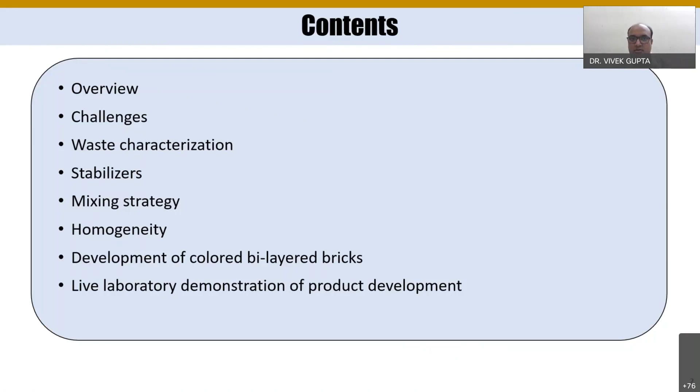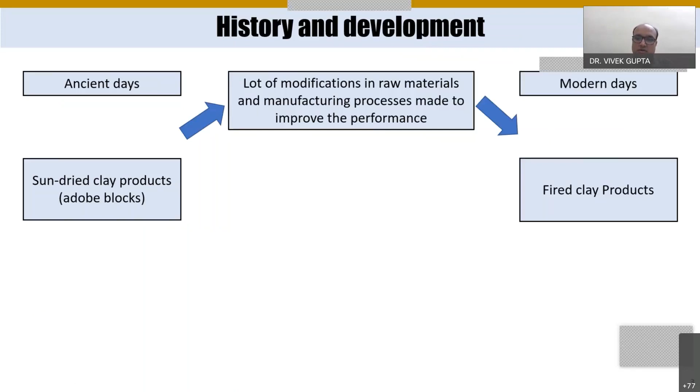So to start with, in ancient days, we were just using the sun-dried clay products for adobe bricks for our building construction purposes. And with the centuries, a lot of modifications have been made in the raw material and the manufacturing process to improve the performance. And it is well known that there are certain issues regarding the durability of the adobe blocks. So we have just improved the manufacturing process, and we reached the fired clay products in the modern days. So in this particular process, somehow we have lost the sustainability.

So this is the brief about the fired bricks, how we prepare the fired bricks. We typically use raw materials like the soil. We use the coal dust in the soil, which acts as an internal fuel for the fired bricks. Then we also use the wooden dust to help in the demolding. In the earlier days, we used to have the casting of the bricks manually by the helpers, but nowadays we have installed the machines, and now we demold the clay bricks from the machines, and we just cast them similar to the unfired bricks. The clay material is very sticky in nature, and it is difficult to demold instantly from the machines, so we use the wooden dust to help in the demolding.

Also, we have used many of the wastes like the agriculture crop waste and stone dust. For the colors, we also use the red surkhi and the stone mining waste for a better color, because aesthetics is one of the big challenges in the brick industry. So then how do we manufacture this? There are four steps mainly in the production of the fired bricks. One is the processing of the raw soil. First of all, in earlier days, what we do, we just...

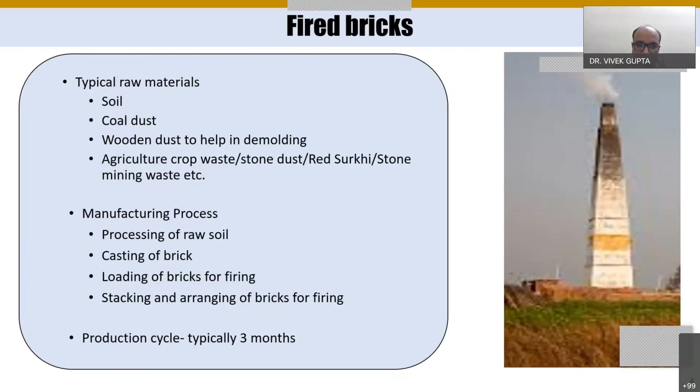When we put it in the sunlight for drying, there is rain and other environmental constraints, which actually restrict the manufacturing for almost 3 to 4 months, and we can say the effective cycle is only 6 months. So this is the typical fired brick, and the production cycle is almost 3 months.

These are the different issues we are facing with the fired bricks. It is a medium to high energy intensive industry. The manufacturing process is highly polluting to the environment. Then it is very highly labor dependent.

In earlier days, we used to cast them in molds manually, but nowadays we have partially replaced that process with machines. We are casting them through machines, but still it is a labor intensive industry, and from the drying area to the firing, their arrangement in the kiln, that complete process is still manual.

Then there is a disposal issue of the fired bricks, like the bricks which are in the mid side of the kiln are rich in soluble chrome and absorbed aromatic carbons. So we cannot dispose them directly in the environment. So these are the different challenges related to fired bricks.

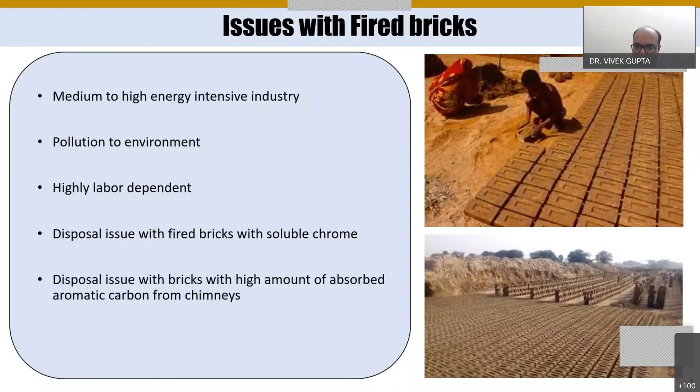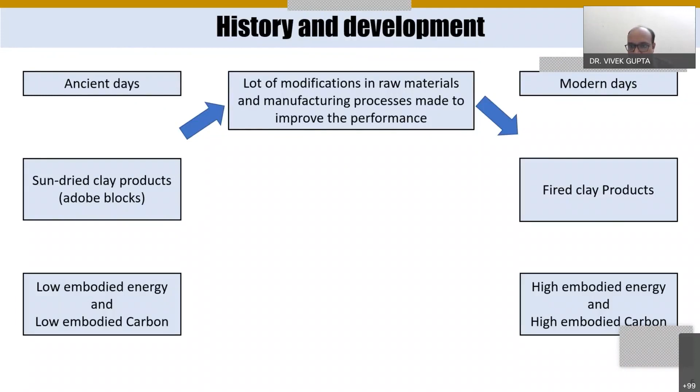In this process, as I explained in the earlier slide, from the sun-dried clay bricks we have reached the fired clay bricks. And the low embodied energy and low embodied carbon product was converted into a high embodied energy and high embodied carbon product. So somehow we have sacrificed the sustainability. So the question for the researchers was how to bring the sustainability back.

What the researchers have done in the previous decades is propose a manufacturing process which is unfired. The unfired brick manufacturing process has been suggested by many researchers to bring the sustainability back. So can we really prepare sustainable bricks without firing?

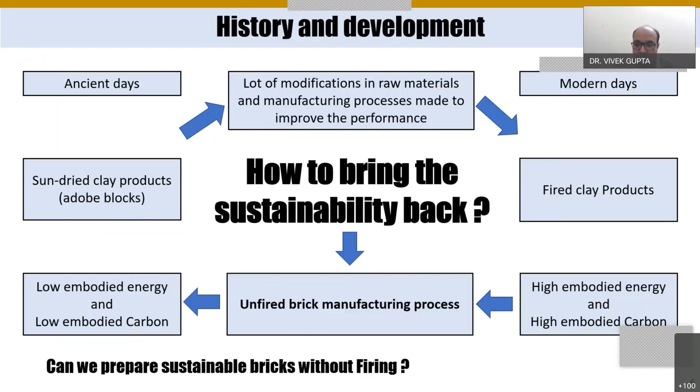Yes, in current markets we have both types of products: the fired bricks and the unfired bricks. The popular fired brick product is the red clay brick, and for unfired bricks we usually see fly ash bricks in the market. These are the two major products we can easily find in the market nowadays.

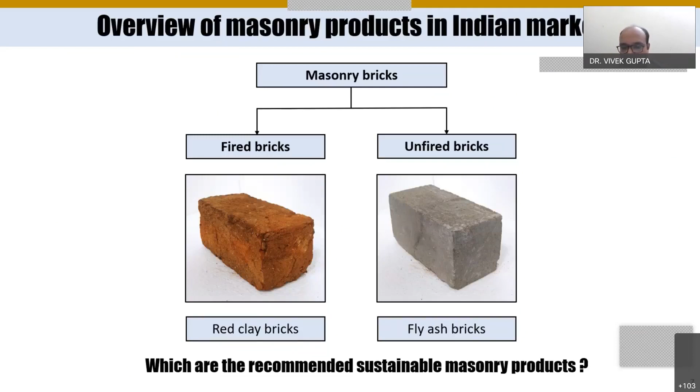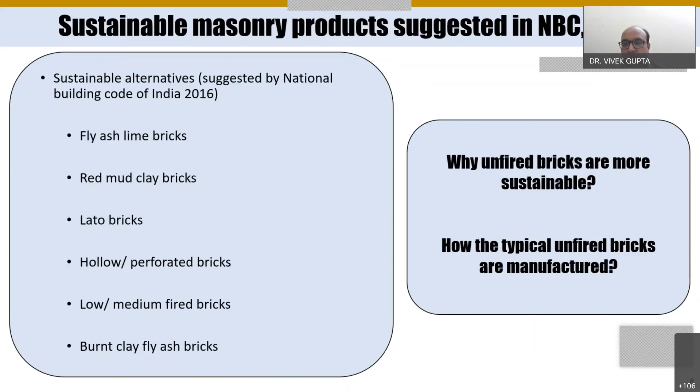The second thing is we are utilizing waste in the unfired bricks. That is another advantage, the conservation of natural resources, by which we are achieving sustainability through unfired bricks. So these are the two things which are mainly important related to the sustainability of unfired bricks.

So these are the unfired bricks, like typically in the market we see the fly ash bricks, and the typical raw materials are: either we use lime or cement as a stabilizer, then sand or stone dust as fines, and fly ash we use generally as a filler material or the partial replacement of, we can say, the binder, as it is well known that fly ash reacts with lime and shows pozzolanic activity. So many researchers considered this as a supplementary binder in the bricks.

Then what are the advantages of the unfired bricks as compared to the fired bricks? These are machine manufactured bricks, the manufacturing process is environment friendly, and the typical production cycle is 1 month. However, it depends on the weather conditions, like whenever we have the winter season, the curing cycle is a little bit longer,

and whenever we have the summer season, the bricks curing becomes faster. However, there are no specific research studies reported, but I have previous experience in the industry, so by experience I can say it depends on the weather conditions. The rate of strengthening of the bricks is closely related to the weather conditions.

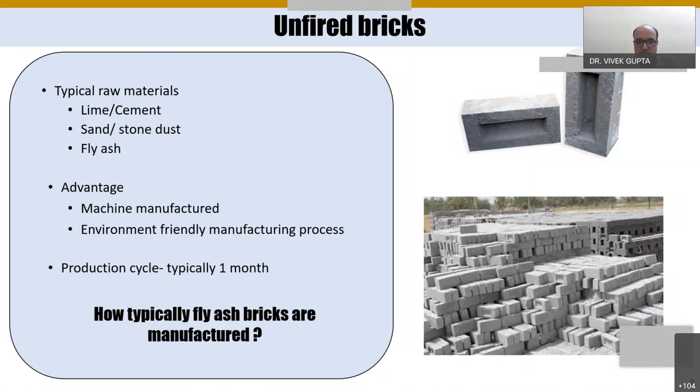So this is the typical manufacturing process of the unfired bricks. Either we use lime as a binder or cement as a binder, and generally we take the lime from the industry and produce the slaked lime in situ at the industry. What we have in the laboratory, we generally use a roller which has two drums in the pan mixer. So the first step is the grinding of the wet lime. Once the lime is ground properly, then in the second step we add the fly ash, stone dust, and some

additional water. This is the second step, but when we are using cement as a binder, the fly ash, stone dust, and cement are dry blended together, and then at the second step we add the required amount of water. But still there is not so much clarity about the mixing sequence, so we have worked particularly on the mixing sequence, like how to mix the materials to get better performance characteristics. We will see that particular work in the later slides.

So in step 3, that particular mix is transferred to the molds for compaction through the conveyor belt, and then we compact them with the hydraulic machines. There are multiple types of machines available in the market. One is the top press machine, where the punch is at the top side of the machine, and then there are some bottom press machines. Also there are some rotary type machines available in the market. So all are based on the compression technology, and some of the machines also have vibration.

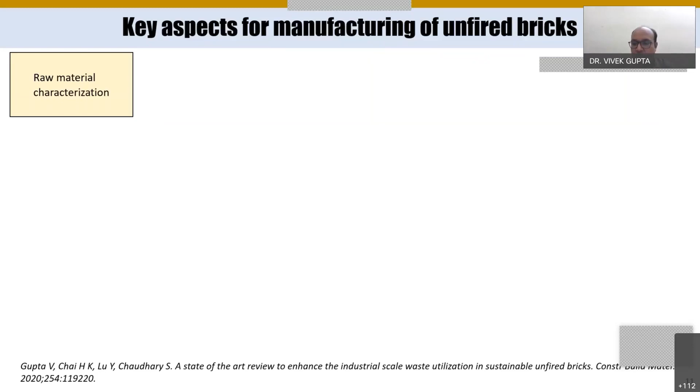So whenever we are incorporating any waste, there is a challenge to characterize it as a raw material. The second thing, when we go for manufacturing, once the raw material has been procured to the industry, there are three important aspects we have to look after. One is the design mix.

The design mix is considered in three parts. One is what should be the binder quantity, then what should be the mix proportions, since there are multiple ingredients like fly ash, stone dust, and lime, so what are the internal dry proportions we can have, then the liquid content. Liquid content is also very important. We have worked on particular liquid content in the mixing sequence, which we will see in the upcoming slides.

Then the second thing is the mixing strategy. In the literature, many people have worked on the design mix, but very little literature is available on the mixing strategy and compaction strategy. In the mixing strategy, we can consider three parts: one is the mixing sequence, like if there are multiple ingredients, what should be the sequence to achieve better performance, then what should be the mixing time, and what should be the mixing equipment.

Then when we consider the compaction strategy, there are two or three types of technology. One is vibration, another is compression, and sometimes we use self compaction like in concrete, if you're familiar with that, self compacting concrete is very trendy nowadays. So these are the three compaction strategies we generally use in bricks: vibration, compression, and self compaction.

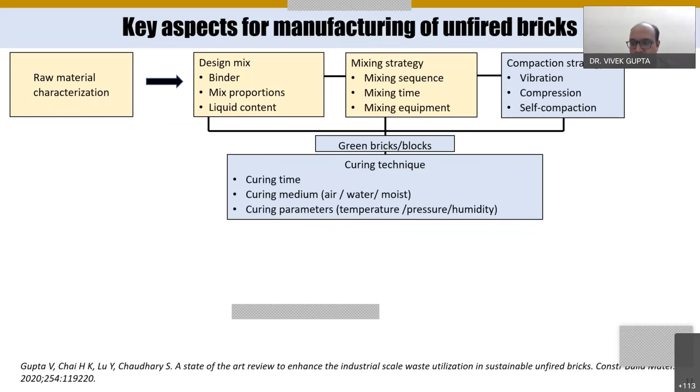Once the curing techniques are selected, the final hardened product is ready. Then we go for a technical check for physical properties, mechanical properties, and durability. From the manufacturing or industrial point of view, we also go for a self check like the cost, production cycle, product handling, and social acceptance.

Social acceptance is also very critical. Suppose we have created some unique product, and if we are not satisfying the expectation of the end user, then somehow we have lagged in our research goals, because ultimately the product we have developed should be used by the end user.

So this is the overall aspects. Whenever we have to incorporate any waste, we have to see what amount we can incorporate in the design mix, what strategy we should select to incorporate that waste in the bricks, what compaction techniques we should use to handle that waste, and then the curing techniques, technical check and cell check. This is the complete aspect related to manufacturing of unfired bricks. Once we achieve this, it can be accepted for industrial production.

The further details we have published in a review paper in Construction and Building Materials. You can see the details there. If you want to go deeper, you can refer to our article, a state of the art review to enhance the industrial scale waste utilization in unfired bricks.

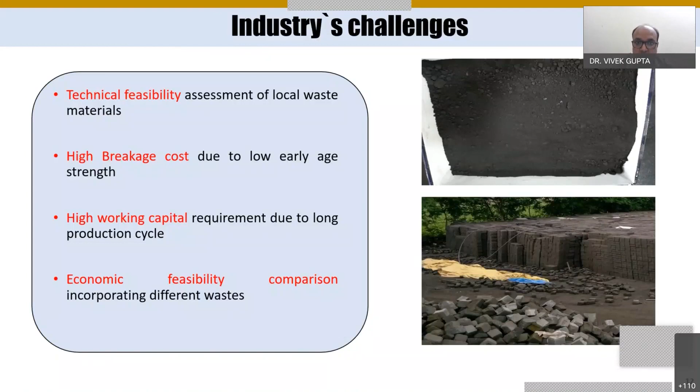Then these are the other aspects, like improper mixing is a huge challenge. We generally mix using a pan mixer, and if you cut the cross section, you can see in this particular picture there are many unhydrated lime particles, or unmixed particles of lime. So this is one of the challenges.

Then the optimization of manufacturing aspects, like the mixing proportions, using different waste mixing strategies, casting methods, and curing conditions. There is a huge scope of research in these particular areas. Then the performance assessment of waste incorporated products, like the mechanical and durability aspects.

And finally the public awareness and technical support to the manufacturers to increase the acceptance of waste incorporated products. Like what I explained in the earlier slide, once we develop the product, it is also very significant that we do public sessions to make them aware of the characteristics and advantages of the waste incorporated products, so that the manufacturer can produce them and the production can be consumed very easily in the market.

So how do we deal with these challenges while maintaining the sustainability of unfired bricks? These are some of the solutions or strategies by which we can enhance the sustainability of unfired bricks. One is to maximize the use of waste material as ingredients.

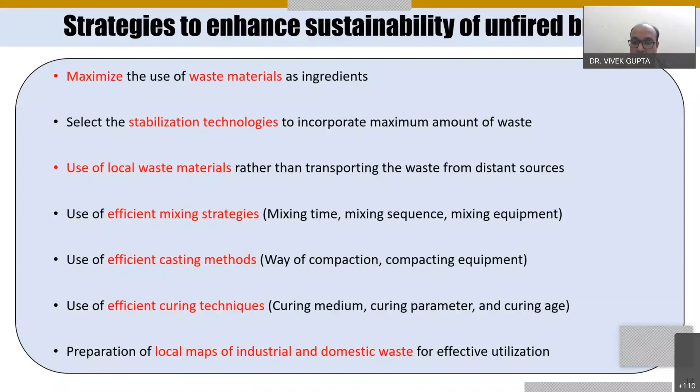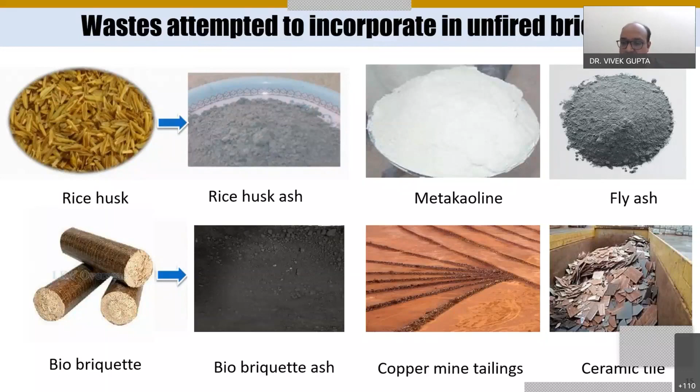So these are the various wastes attempted to be incorporated in unfired bricks. One is rice husk ash, as you've seen researchers have worked on. Then metakaolin, fly ash, and similarly bio-briquette — majority of local industries either use wood, bio-briquette, or coal for their local fuels in the boilers, so from the bio-briquette you get bio-briquette ash. Then copper mine tailing, ceramic tiles — so many wastes the researchers have worked on, but still, as I explained in the previous slides, the industrial scale implementation is very low.

So people have worked on recycled paper mill residue, phosphogypsum, pond ash, quarry dust, crumb rubber, brick dust waste, cement kiln dust, raw boiler ash, ground boiler ash, and GGBS.

So when we analyze the literature, we see that different types of ashes are mainly attempted to be utilized, either in processed or unprocessed form, or as solid powder waste. Many studies have pulverized the particular waste and used it as a filler or partially as a partial binder in the bricks.

So how do we deal with these varying characteristics of ashes? This is a very key challenge. We have technical feasibility reported by many researchers, and we have waste available in the local vicinity, but still we are not able to utilize it directly as a raw material in the industry. So what are the constraints?

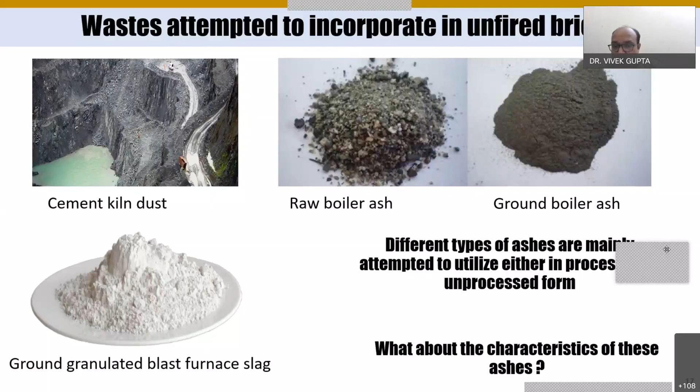Just to understand this, in the upcoming slides we'll see the characteristics of these fly ashes and why they differ. So I have put this in the objective form: to establish a comprehensive methodology for characterization of industrial ashes for potential utilization in unfired bricks. Like how to characterize them so that we can get the true characteristics of those ashes. So we have published two articles from this particular objective.

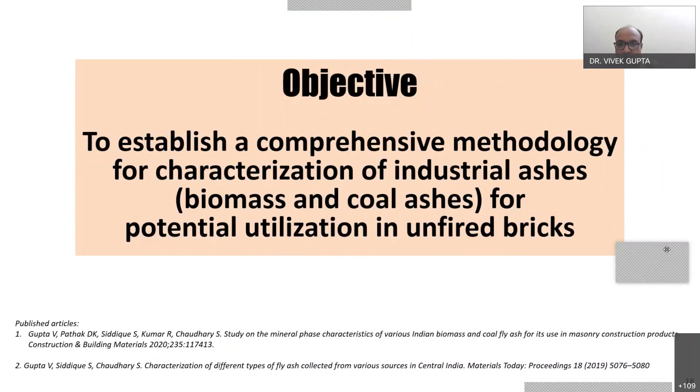So what is this D band and G band of the carbon? Whenever we are characterizing the ash, there is an important difference in the unburnt carbon. And the unburnt carbon we generally judge through the loss on ignition value. But for the ashes, the LOI is not the true representation. It is a quick tool by which we can characterize this, but it is not so foolproof. We will see in the upcoming slide why the LOI is not representing the true

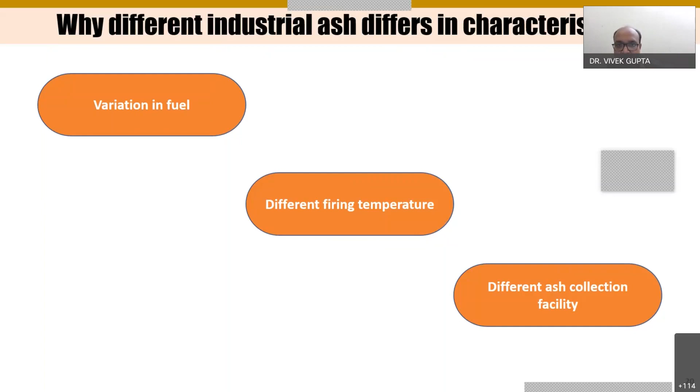So then why are we not able to characterize with the existing technical standards? One thing is the complexity of industrial ash, like the high amount of unburned carbon and the highly dynamic mineralogical characteristics we get in industrial ash. The second thing is the limitations of our existing characterization standards. The existing standard for pulverized fuel ash for lime pozzolana mixture application specifies only the qualifying criteria and recognizes coal-based thermal

power plant ash only. And chemical characterization through traditional titration methods consumes a high amount of costly chemicals and is time taking also. So those are not so useful, or we can say they're not quick enough for quick characterization at multiple times. Then the LOI, as I have explained, is also unable to comment truly on the unburned carbon. So these are the deficiencies of the existing characterization standard we have for ash for the lime pozzolana mixture application.

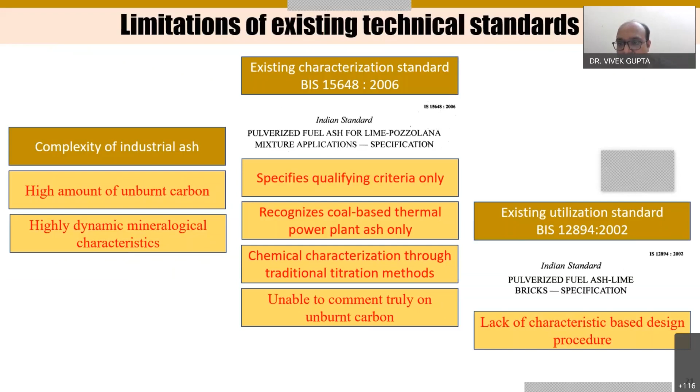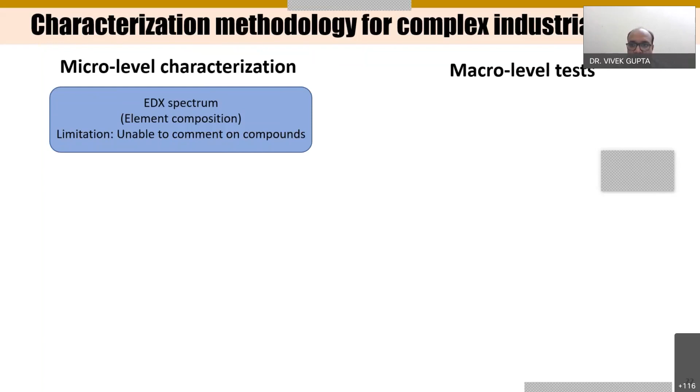So we have proposed a characterization methodology for complex industrial ashes, and we have done two different types of characterization. One is the micro level characterization of the ashes, and there are some macro level tests. Based on different individual techniques, we understood the limitations and advantages of each technique, and we have proposed a comprehensive methodology for micro level characterization. We have involved four different things. The EDX spectrum gives very good elemental composition but is unable to comment on the compounds. We can detect whether calcium, silicon or oxygen is present, but whether it is calcium carbonate, calcium oxide or calcium sulfate, we cannot detect from the EDX spectrum.

Secondly, from the XRD pattern, we can detect the crystalline phases very well, but the amorphous phases may go undetected. So that is another constraint of XRD patterns. Then another thing is the FTIR spectrum; many of the amorphous phases are IR active and we can detect them from FTIR, but amorphous carbon still goes undetected in the FTIR spectrum. So for that we have used the Raman spectrum, and it has the advantage that IR inactive phases which are Raman active can be detected using Raman spectroscopy, and additionally we can detect amorphous carbon, whether the LOI is due to amorphous carbon or due to carbonate, that can easily be identified through the Raman spectrum.

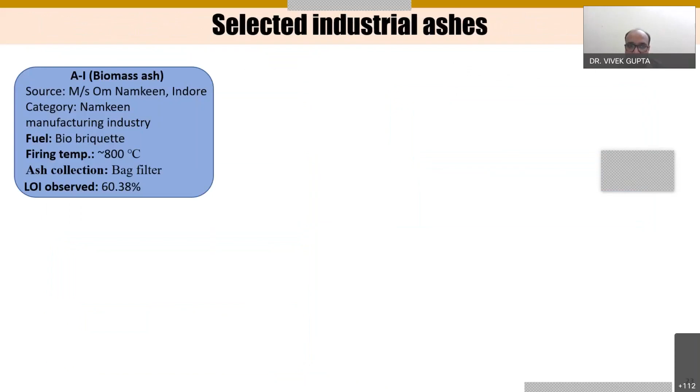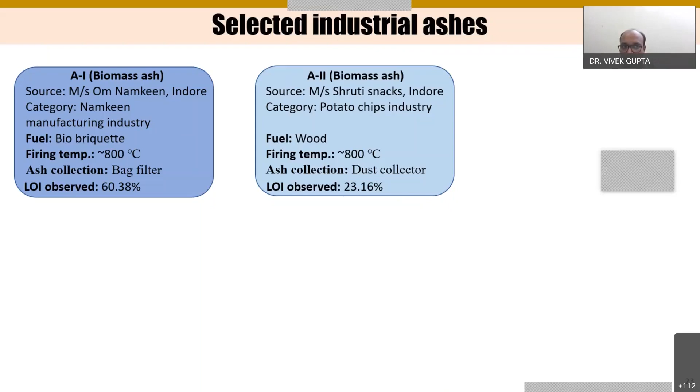So we have carried out our study on 6 different industrial ashes. We collected 2 biomass ashes from local industries, Om Namkeen and Shruti Snacks, industries in Indore. In the A1 ash, which is biomass ash, they are using bio briquettes as fuel, and the firing temperature is 800 degrees Celsius. The ash collection facility there is a bag filter, and we observed high LOI, almost 60%, 60.38% in biomass ash A1. Whereas in A2, we observed 23.16% LOI, and the ash collection facility they were using is a dust collector. You can easily compare how, due to the variation of fuel, the characteristics of the ash differ from one industry to another.

Then we have also taken coal-based ashes from 3 different industries. One is from the beverage industry, another from the textile industry, and another from the graphite electrode manufacturing industry. From the LOI, you can see it is varying from 7.83% to 12.18%. Then we also considered in our study comparing these industrial ashes to thermal power plant ash. We collected one ash from the Sri Singaji thermal power plant, and the LOI was observed as 2.22%.

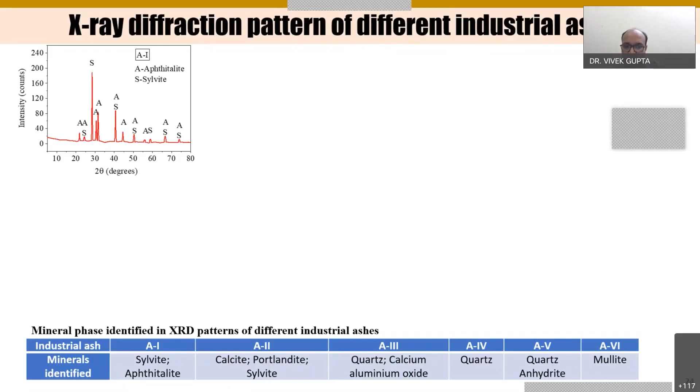So we have analyzed the XRD patterns of different ashes, and we found that in the A1 ash, sylvite and aphthitalite minerals, then in A2 calcite, portlandite and sylvite minerals. Then A3, A4, A5 and A6 are the coal-based ashes.

So we have found the quartz, calcium aluminium oxide and the anhydrite in the A3 and A5 ashes, and based on the presence of reactive mineral phases, we have commented on its utilization. I will not go into much detail in these things. I'll just tell you these are the mineral phases present.

One important thing: in the A6, although the LOI is very low, we have found the presence of mullite, and mullite is reported as an inert, or non-reactive, mineral phase. And this is the major challenge in power plant ash. The majority of power plant ash has low LOI, but still we are not getting good lime reactivity because of the formation of mullite. So this is another challenge we are facing in Indian coal ashes.

Whenever we have temperatures of more than 1200 degrees Celsius in the thermal power plant, we generally find the presence of these mullite phases, and it reduces the reactivity. So you will see that although we are getting low LOI in the A6, still we are not getting good lime reactivity when we see the results of the macro test.

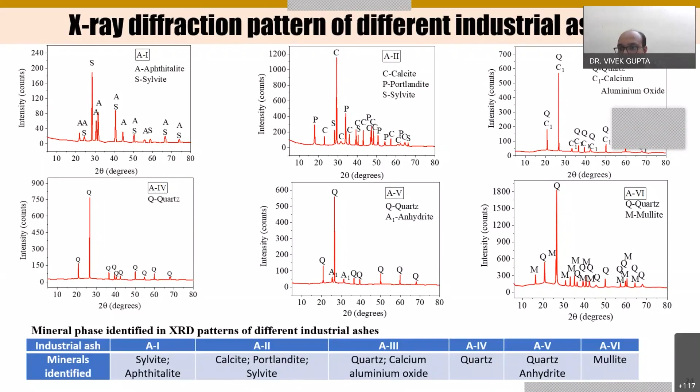So from here you can conclude directly that the LOI cannot restrict the utilization of the ash. Although in the codes it is given that the LOI should be less than 5%, we will see that the A3, A4 and A5 ashes, which have more LOI, still give good strength, or good qualitative index, when we go for the lime reactivity test.

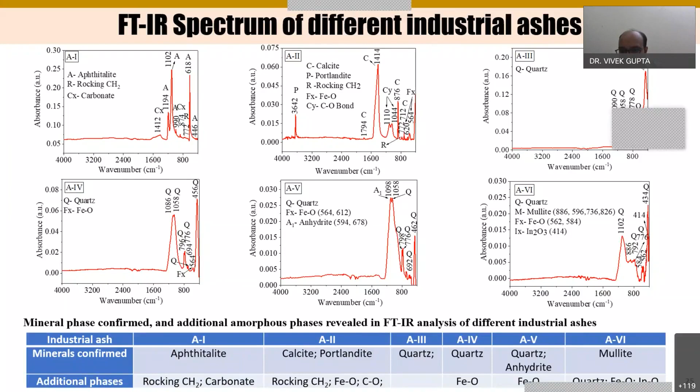Okay, so then we have carried out the Raman spectrum. In the FTIR, we were not able to identify whether amorphous carbon is present or not. So we conducted this Raman spectrum, and we observed the D and G band carbon in all the ashes. And when we went through the Raman spectrum of the industrial ashes, we were not able to identify the glassy phase of the matter present in the ash.

Then in A3 and A4, which are the silica-rich ashes, we were not able to identify the minerals in the treated samples due to their high luminescence. The luminescence can be due to the high amorphous silica, and investigations are still being carried out to identify the exact reason behind this luminescence.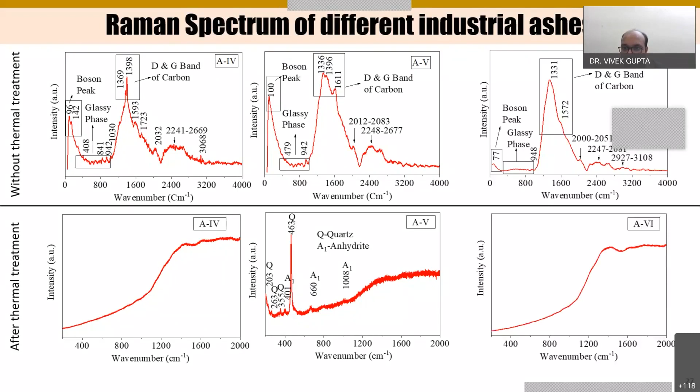So in A5, which has less silica compared to A3 and A4, we were able to identify the anhydrite and quartz phases. In another manner, due to the high anhydrite component, we were able to identify those in the spectra. So ultimately, due to the presence of inherent minerals, the reactivity of A5 and A3 ash is high, and the same we have observed through the lime reactivity test.

We have observed the highest lime reactivity of 8.17 Newton per mm square in the A5 ash, and the second is the A3 ash. And you can see, although the A6 ash has a very good LOI value, still the lime reactivity is very less due to the absence of inherent minerals.

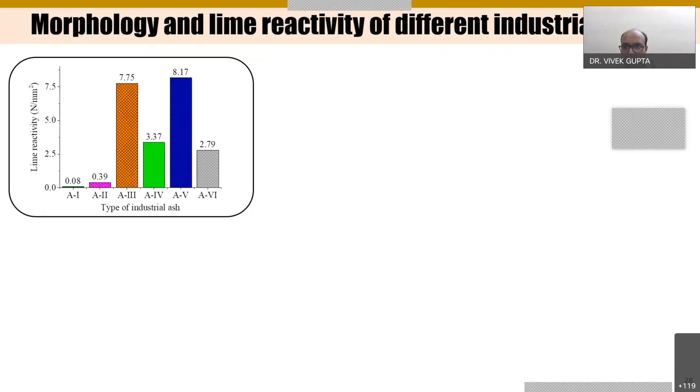And then we have also studied the morphology of the different industrial ashes, and we found that the irregular shaped ashes, like A3 and A5, show better properties when we go for the lime reactivity. In the literature also, researchers have reported that whenever we have angular characteristics of the particles, it gives better mechanical properties due to the interlocking effect.

And you can note down that in concrete, when we are preparing a flowable mix, we prefer spherical particles of the ashes. But when we are going for compressed bricks or unfired bricks, we do not require the slump flow. We generally use a low moist mix for the casting of the bricks. So the angular characteristics of the ashes are not detrimental to the properties of the fly ash bricks. And probably the angular characteristics have resulted in the better lime reactivity of the ashes.

So these are the key conclusions from this particular part of the study: a comprehensive characterization methodology comprising macro level tests and micro level characterization techniques has been found suitable for the characterization of industrial ashes. And we can get the holistic picture if we want to utilize that particular ash in unfired bricks.

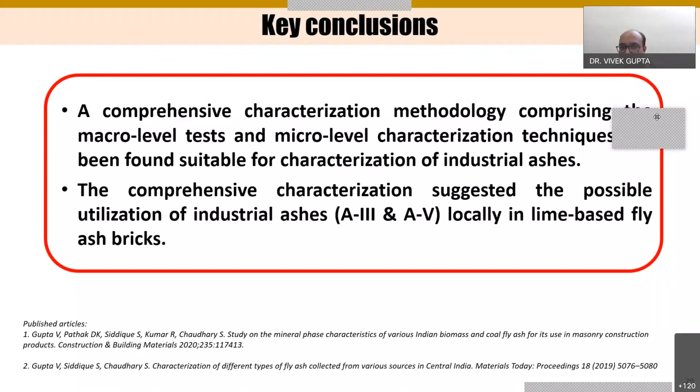The second thing is the comprehensive characterization suggested the possible utilization of the industrial ashes A3 and A5 locally in lime-based fly ash bricks. And industry has really implemented these suggestions, and now they are using those ashes for preparing their fly ash bricks.

The second thing is the different stabilizers used to incorporate waste in unfired bricks. There are multiple stabilizers in the market. We can categorize them as cementitious binders or cementitious stabilizers, then chemical stabilizers, or other stabilizers, the biostabilizers. The cement stabilizers are like cement and lime, and the chemical stabilizers which are very popular are sodium hydroxide and sodium silicate.

Many researchers are using these particular chemicals for stabilizing the waste for unfired bricks. And some researchers also used alginates for stabilizing the waste and preparing the bricks. So these are the different stabilizers which are in use.

Then what research objectives can we have? The optimization of binders: the use of blended binders can be another opportunity. Right now we are just using cement or lime, or if we are going for chemical stabilizers, we are not using the cementitious stabilizers in the industry. In recent literature, people are trying to use them as a mixed binder, using cementitious and chemical binders together while preparing the bricks. So that can be a future study area where we can use blended binders for optimization.

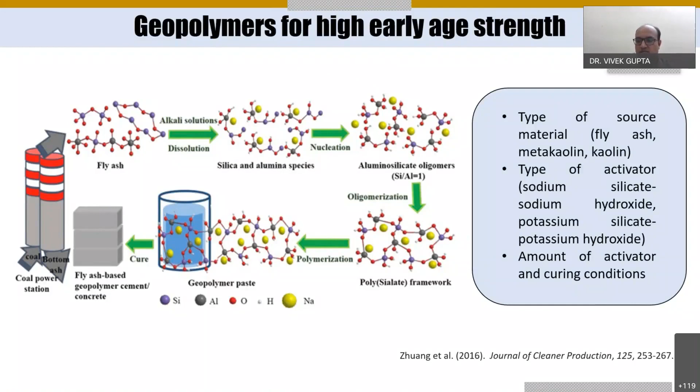Then the amount of activator and the curing condition can be explored, like what could be the optimum amount of activator, and what could be the best curing conditions if we are going with geopolymers. Then these are the different aspects related to mixing strategy.

We have analyzed the literature and found that the mixing sequence is very important in the case of blended mixes and materials with different states, like if we are mixing the wet lime slurry with dry stone dust or dry fly ash. So the mixing strategy plays a very important role.

If you directly mix the lime and fly ash, it may result in lumps. And if you do not give a proper mixing time, the lumps may go into the bricks and deteriorate the performance of the bricks. So the mixing sequence is a very important aspect, and in the literature, the two-stage mixing sequence is most common.

However, there was no study reporting the comparison of the two-stage mixing sequence and the three-stage mixing sequence. So we have done work on that, and we have found that the two-stage mixing sequence is better for the particular set of raw materials.

The mixing time varies in the literature from 4 minutes to 15 minutes. In some cases, special mixing equipment is required to handle the raw materials based on their characteristics. One great example is from SVNIT Surat, where Professor Raut proposed a specific mixer for handling paper mill residue.

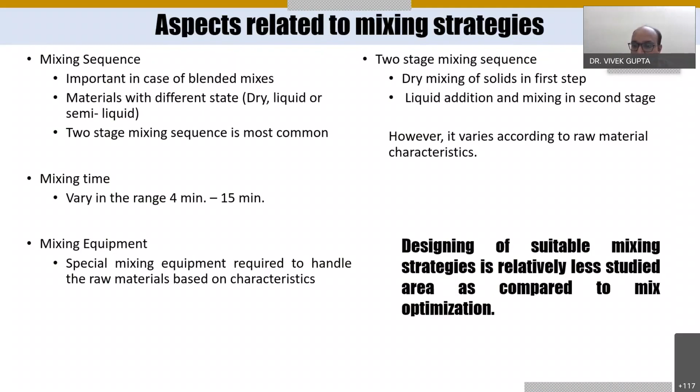So designing a suitable mixing strategy is a relatively less studied area compared to mix optimization. I recommend that if someone really wants to do research related to mixing strategy, they should focus on these particular aspects for their research objectives. This is what we have worked on: the mixing sequence and the moisture content for unfired bricks.

These are the different literature. For bricks, we don't have much literature. So I put some literature where Hiremath and Yaragal in 2017 observed the effect of mixing sequence on reactive powder concrete, and they observed better flow properties and better mechanical properties using a four-stage mixing sequence where the diluted superplasticizer is added to the binders only, and the remaining dry ingredients are added at a later stage.

These are specific to reactive powder concrete. We cannot directly implement that outcome for our unfired bricks, but they support designing the initial mixing sequences. We can use that literature by making our observations concerning our raw materials.

Then Hou et al. in 2020 observed the effect of the mixing sequence of nano silica on hydration and hardening properties of cement-based materials, and reported that compressive strength is closely related to the mixing sequence of the raw materials. Although we started our work before 2020, later on we included this literature while presenting our work.

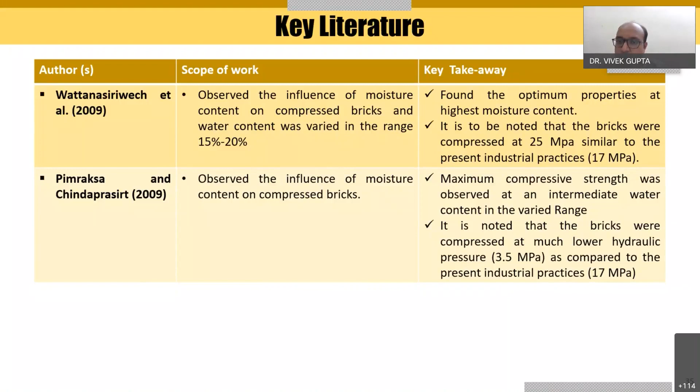It has been noted that the bricks were compressed at much lower hydraulic pressure as compared to the present industrial practices in that particular study.

So what we have proposed, we have taken two different mixing sequences in our present study. In mixing sequence one, in stage one we have added the fly ash and the lime, and in stage two, after 60 seconds, we have added the liquid as a second stage addition, and in the third stage we have added the stone dust. Whereas in mixing sequence two, we have added the complete dry raw materials as a stage one addition, and we mix them for 90 seconds, and then in stage two we have added the liquid.

And these two mixing sequences we have compared for the complete moisture range. Like we have chosen the...

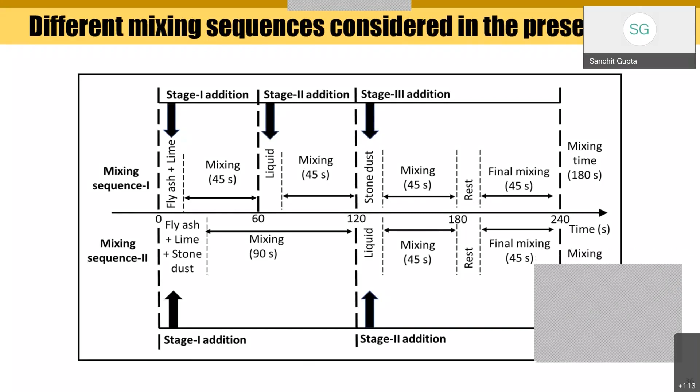Then we have just selected the workable range of moisture content, like below 10% it is unable to bind our raw material composite, and after 15% it shows the bleeding. So we have selected this particular range from 10% to 15% for our study. It may vary based on the raw materials, but this same methodology can be implemented for the respective raw materials.

Then we have chosen a particular binder ratio based on our compressive strength requirement. We targeted 10 MPa, which is the required compressive strength as per the CPWD norms for building bricks. So we prepared these 10 mixes based on 5 different moisture contents and 2 mixing sequences. And then we have conducted these different tests.

So I just put some of the test results, not all in detail. You can refer to the article. We observed the compressive strength, microstructure, dynamic modulus of elasticity, drying shrinkage, impact energy, bulk density, water absorption, percentage voids, and efflorescence.

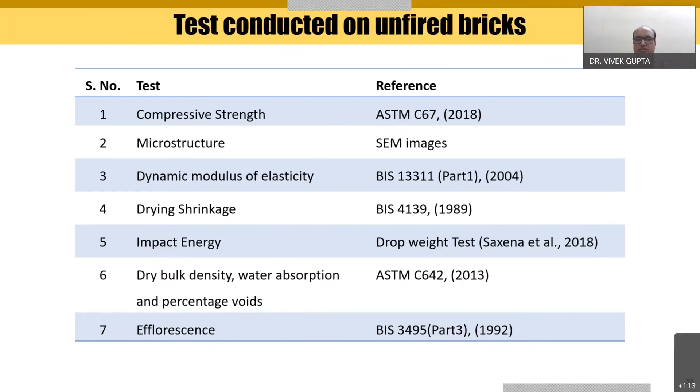Then this is the microstructure we observed, like in the M1 mix as compared to Q2 mix. In Q2 mix you can see we observed the strong ITZ, the interfacial transition zone, whereas in the M1 mix we found the weak hydrated phase. So the results observed in the macro tests, like the compressive strength test results, are in good relation with the microstructure observed in the unfired bricks.

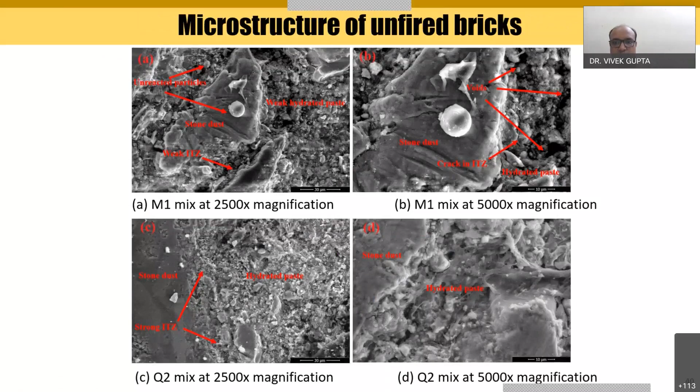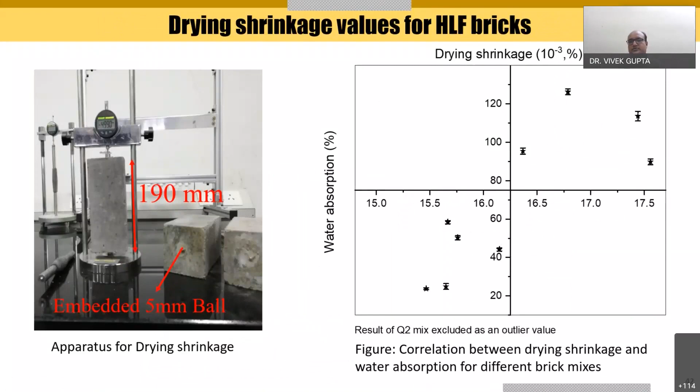Then these are the similar trends we observed for the dynamic modulus of elasticity, and these are the results of drying shrinkage, where we found that the drying shrinkage of the bricks is closely related to the water absorption characteristics of the bricks. In the low water absorption characteristics, we found low drying shrinkage, and for high water absorption characteristics, we found high drying shrinkage.

These are the key conclusions from this particular objective: the combination of high liquid content and mixing sequence two. Please note that the high liquid content should not bleed out, because if it bleeds out, there may be chances of binder imbalance, and that may result in deterioration of performance. So the high liquid content and mixing sequence two should be in the workable range, and we have reported this as an optimum production method for achieving higher compressive strength of unfired bricks.

The bricks made with mixing sequence two achieve higher modulus of elasticity due to the better distribution of particles and a homogenized brick matrix. Then the drying shrinkage is closely related with the water absorption value of the brick, and higher water absorption results in higher values of drying shrinkage in HLF bricks.

This particular work was related to the mixing sequence. We also worked on the mixing equipment, to design new mixing equipment for powdered hydrated lime instead of slaked lime. What we have proposed, like right now we have a rainy season, so one of the industrial challenges is that in the monsoon season they have to stop production due to the constraint of moisture content.

What happens is, in the industry we generally store the materials in the open air, and in the monsoon there is a huge absorption of moisture in the fly ash or stone dust. Whatever material we get from the supplier contains a high amount of moisture, let's say 30% or 40%, and we cannot use that material like that. As shown in the previous slides, the optimal moisture content for our raw material is proposed as 15%. If we get inherent moisture content more than that, say 20 or 30%, we cannot use it directly in the bricks.

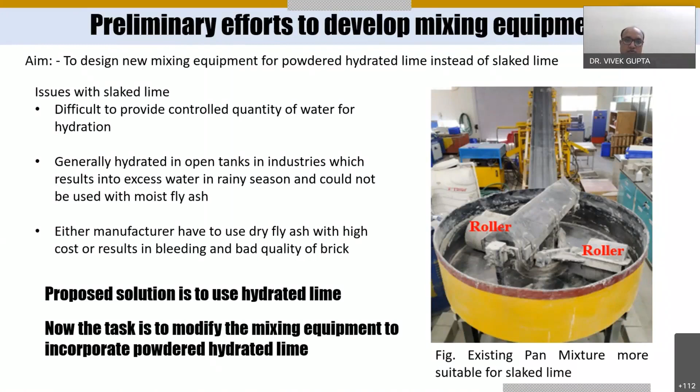We tried to develop the initial design and built a lab prototype in the vertical form. Later we converted it to the final product in a horizontal ribbon blender.

I'm just playing this, maybe you are able to see the video.

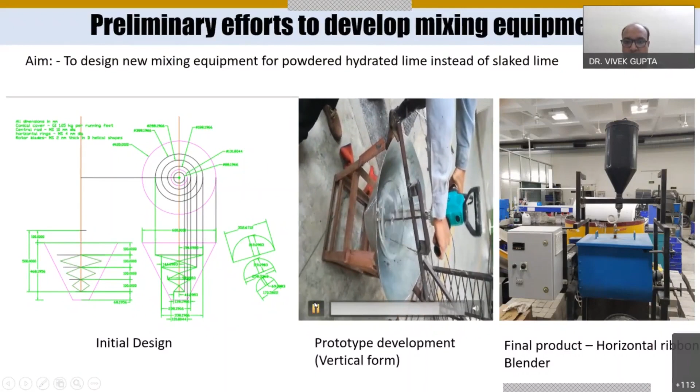This is just to demonstrate how the initial design was developed, then converted to the prototype, and finally reached an industry-level ribbon blender. However, work is still going on to optimize the RPM of the mixer and other aspects so that the industry can use the equipment.

If they want, they will shift from slaked lime to powdered lime. I put this slide to give you an overview of how much effort and what different aspects we have to look into when we want to implement our research directly in industry. It is not that we just propose something, do some mechanical or durability property tests, and then propose them to the industry.

We have to look after all the relevant aspects, like the mixing strategy, compaction strategy, design mix, and curing strategy. Suppose we propose a change that increases the production cycle from 1 month to 3 months - then there is no use, because the industry will not be interested in implementing it.

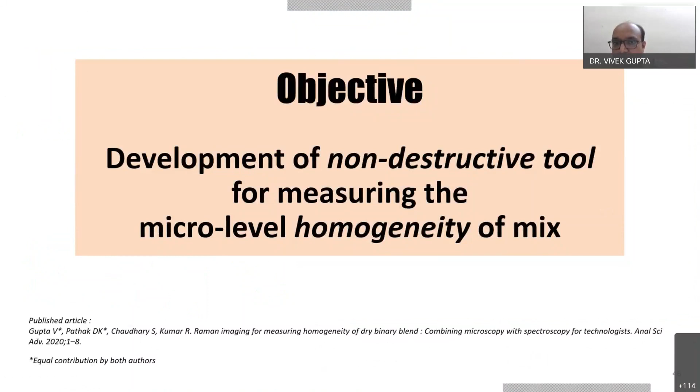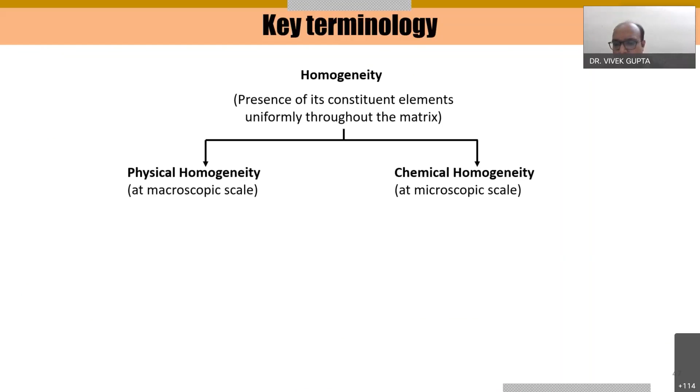What is homogeneity? It can be understood as the presence of constituent elements uniformly throughout the matrix. I categorize this into two parts: physical homogeneity and chemical homogeneity. Physical homogeneity, which we generally observe in concrete or similar products, is observed at the macroscopic scale. We generally use physical characteristics like particle size, optical reflection, or color, or do tests like UPV, density, or pore distribution of the resultant matrix - either identifying based on the particles, or doing tests on the resulting matrix.

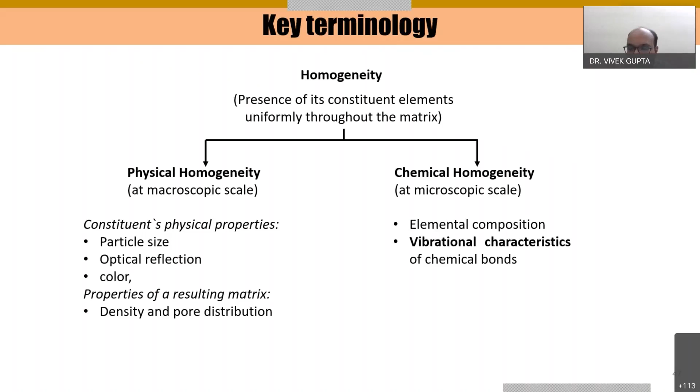However, chemical homogeneity is a bit different. We are generally interested in it at the microscopic level - either the elemental composition, the distribution of elements throughout the matrix, or the vibrational characteristics of the chemical bonds. So basically we have worked on chemical homogeneity at a microscopic level.

Secondly, I want to quote another reference by Riolo et al. in 2018. They found that Raman spectroscopy can be a tool for process analysis to determine the end point of mixing of pharmaceutical blends. We took the idea from there and tried to implement that knowledge in our building construction materials. Based on standard deviation analysis, they found that the Raman spectroscopic data were more substantial than the data obtained by the conventional HPLC method, high performance liquid chromatography method. So we used Raman spectroscopy to determine the homogeneity of the blended mix.

These are the existing ways: optical image analysis, electrical resistivity measurements. You will see in different literature methods like rheological performances, gamma ray attenuation, UPV, X-ray computed tomography, and CIELAB. These are different methods which measure only the physical homogeneity.

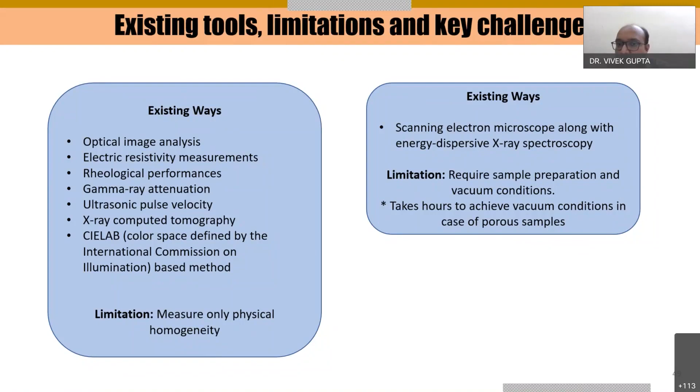However, there are certain methods for chemical homogeneity also, like scanning electron microscope SEM images along with EDS, which we generally use for chemical homogeneity. But it still requires sample preparation and vacuum conditions. Specifically, when going for unfired bricks, it takes hours to achieve the vacuum condition in case of porous materials - very difficult to take SEM images, and it takes hours to get the vacuum conditions.

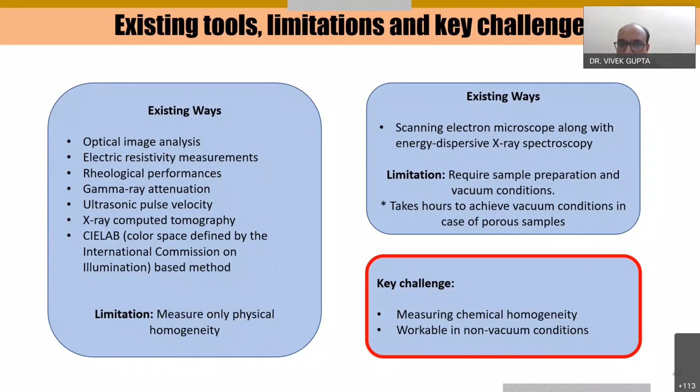So the challenge was: we want to measure the chemical homogeneity, and we want to select or develop such a tool which should be workable in non-vacuum conditions, because in vacuum conditions it was taking so much time. So what we have done is we used Raman spectroscopy.

We have presented a three-stage methodology which can be used for similar applications - you can also implement this methodology for your respective material. In the first stage we identify the characteristic peaks in the separate heaps. In the second stage we check the mutual interference at the common boundary. In the third stage we develop the Raman area map in the mixed form. So these are the three stages.

In the first stage we take the spectra in isolation, then we try to bring them together at a common boundary, so we can take the spectra of individual material and check whether the spectra of one particular material is interfering with the spectra of another or not. In the third stage we actually blend them together and take the spectra of the blended material.

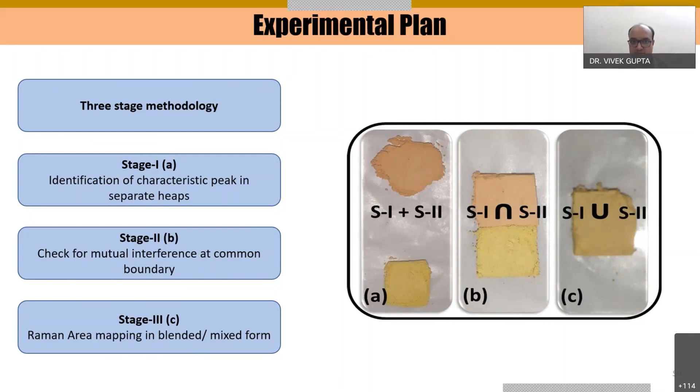What we found: in the first stage we were able to identify the individual peaks of each ingredient. We took two stone types - one is Dholpur stone, another is Jaisalmer stone - and identified the characteristic peaks, selecting the representative characteristic peak of S1 as 463 inverse centimeter and 1086 inverse centimeter for the S2 stone. You can see the similar observation in the maps.

You can identify how the boundary between the two different materials is changing. We made a common boundary and took the line measurement, and you can see at the upper side you can identify one material, and at the bottom side the other material - the top one is S1 and the bottom one is S2.

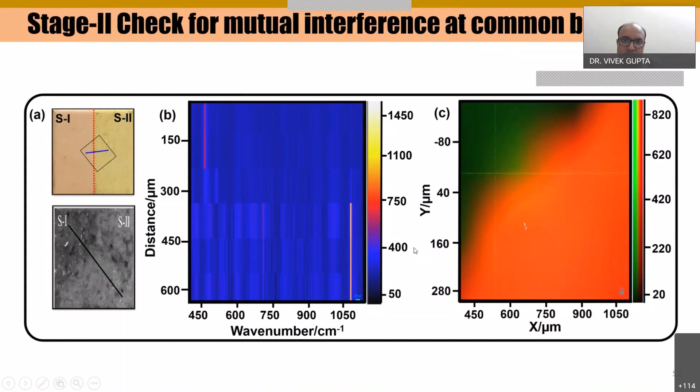So we took multiple images at different locations, and based on those locations, in all the images we found the presence of both materials, and we could identify both materials at the microscopy level.

And then we have commented that it can be a tool for measuring the homogeneity of the matrix. However, the quantitative index can be developed further for the quantitative analysis. Till now we have worked on the qualitative analysis of the homogeneity.

So from our Raman map, we can conclude that a Raman map very clearly identifies the material at a micro level, which is otherwise unidentifiable optically. You have seen in the first image A, that is the optical image, we could not identify which material is present at which place.

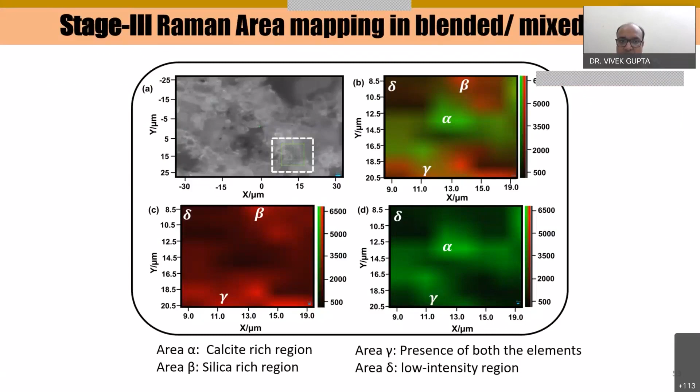So the three-stage experimentation performed using the two constituents well demonstrated the efficacy of the developed homogeneity tool for the dry blended mix. However, it can be further extended to the wet blended mix.

So these are the other aspects related to the compaction method. In the literature, these are the three different methods, and most common in bricks stabilized with the cementitious binder is the compression technology. Then liquid content in the mix is another important aspect we have seen in the previous slides. Then rheology of the mix, that is also important, especially in the self-compaction mixes.

And the compaction parameters like the compaction rate, the compaction pressure in case of compression, then the compaction duration. In some of the literature, they have worked on long compaction durations also, up to certain minutes. However, in the industry, we generally go for the 10-second compression.

Then what is the benefit of compression? It gives instant demolding, high density of the bricks, and low liquid content is required. However, it varies according to raw material. I have already explained that. Then the approach to select the suitable water content varies significantly in the literature, for which we have worked on. I have explained it in the previous slides.

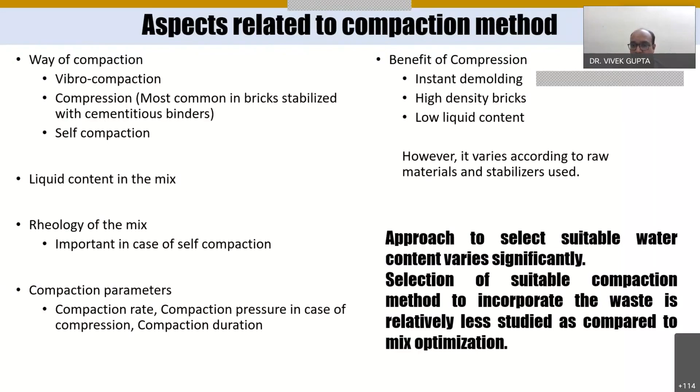Then these are the different aspects of the curing conditions, like the curing medium: air, water, and hybrid curing are trending nowadays. Then the curing age, 1 day to 90 days. And then these are the curing parameters: temperature, humidity, pressure. So hybrid curing is nothing but using different curing mediums for varying curing durations.

Let's say, suppose for the first 4 hours they have just put it in the ambient air, and after that they have put a wet cloth for 7 days, and then they have put it in water for the next 21 days. So that can be considered a hybrid curing method. So different curing parameters we have to optimize for the different stages of curing.

However, it varies according to the stabilizer we are using, whether it is a geopolymer, a cementitious binder, or a bioalginate. So based on those chemical reactions, we have to select the curing conditions.

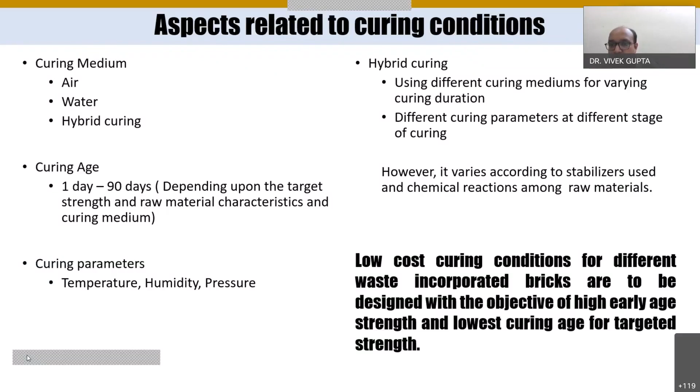However, low cost curing conditions for different waste incorporated bricks are to be designed with the objective of high early age strength and a lower curing age for the targeted strength. Basically, this should be the target for designing curing conditions.

These are the other concerns related to comparative analysis of the different wastes. So waste is not waste for the manufacturers in the Indian scenario. As I explained earlier, the cost of waste procurement includes loading, unloading, and transportation by weight. Even if it is available free of cost, the manufacturer has to bear that particular cost.

The majority of freight transportation vehicles are diesel based, non-renewable, and fuel cost is very high. The varying distance of the procurement source also affects the cost of the waste. Then what should be the ideal way to compare different wastes? Suppose a waste is available in the near vicinity of the industry, and another waste is 300 kilometers from that particular manufacturing facility.

So the unit of measurement for sale of bricks is the number of bricks of a specified size, meaning a particular volume. Okay, so if we are incorporating any waste, we should be concerned about the volume of the waste, not the weight of the waste. Suppose a particular waste occupies more volume in the brick matrix, then at the same cost, it can have relatively better economic feasibility in the bricks.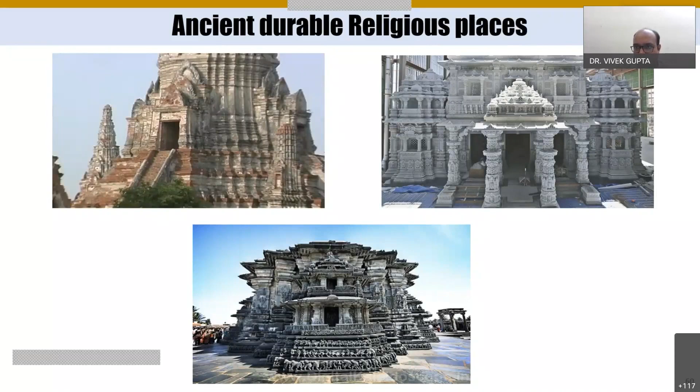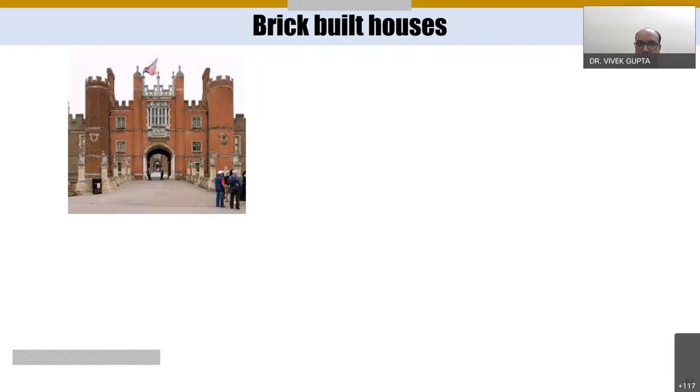But what happens? Why have we shifted from the stones to bricks? Also you have seen the religious places. These are the different religious places from the stones, so they are durable after so many centuries. So it is very well known that the stones are more durable. But why we have shifted from the stones to the bricks, that we should understand. These are the different pictures of the stones, and these are the different structures of the brick built houses.

So there is a shift in the construction technology: from the load bearing structures, we have shifted to the framed structures, and by the change in the technology, bricks nowadays are more for the partition walls, or we can say the filler walls. So durability is still the important aspect. So what we have done,

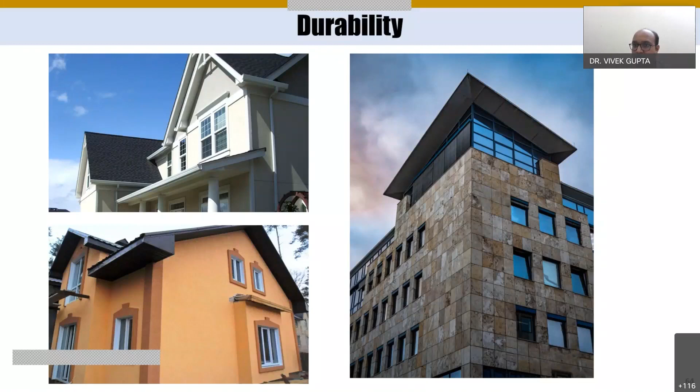when we are using the bricks, we generally use the plaster and paint for the houses, and sometimes, based on the availability of budget, we also use the stone cladding. So from there we struck out: why shouldn't we improve the aesthetics of the bricks in such a way that there should be a stone at the top layer of the brick.

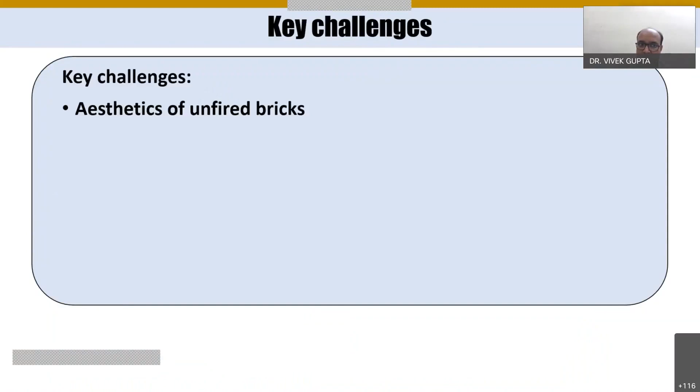So these are the key challenges which we have considered. One is the aesthetics of the unfired bricks. The second is the search for a low cost material which fits into the budget of the brick mixes, typically in the range of 1 to 1.5 per kg. Then economic competitiveness of the proposed solution in the existing product range, and the manufacturing feasibility of the proposed solution in the existing industrial setup. So these are the key challenges we have considered in this particular area.

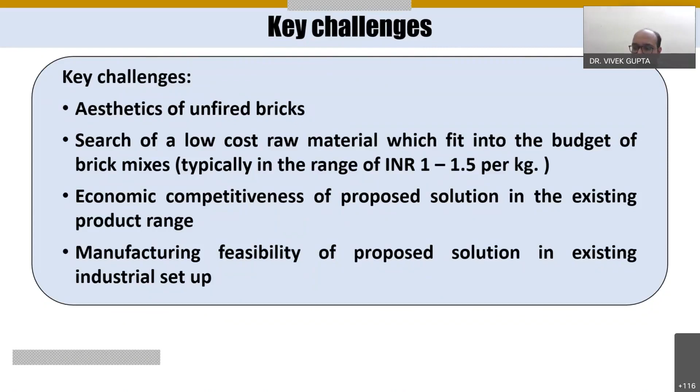And how to improve the aesthetics of unfired bricks at low cost while maintaining its sustainability. So we have used the stone waste. These are the reasons, or we can say motivation, for using the stone waste. One is that the stone wastes have inherent color. The second thing is the stone wastes are originated from durable stones, and the third thing is the availability of dimensional stone waste in huge quantity.

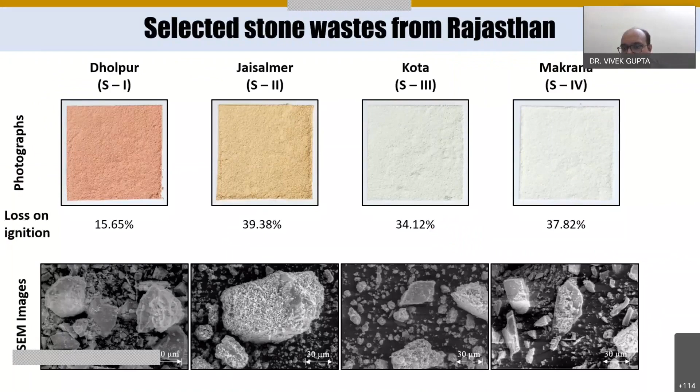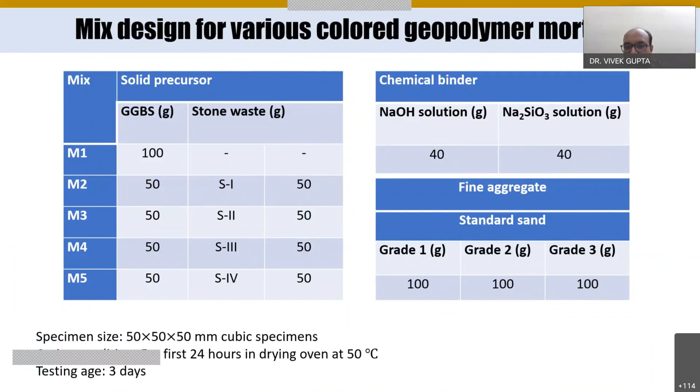So we have selected 4 different stone wastes from the Rajasthan area, and we have analyzed the morphology, and we found angular particles which are very well suitable for our fly ash bricks. So we have used geopolymer mortars, and using the different solid stone wastes, we have prepared different colored mortars, and we found that among the silica rich and calcium rich, the calcium rich stone waste, which is the mix M3, M4 and M5, gives the better strength with the color aesthetics.

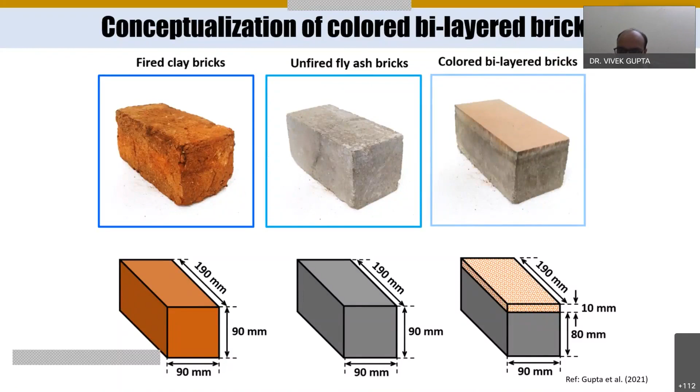Although the M2 is also qualifying for the 10 Newton per mm square strength. So these are the different bricks we have produced. One is the fired clay bricks, and another is the unfired fly ash bricks. And we have produced this hybrid, we can say the bi-layered colored bricks using the stone waste. To improve the economic viability, we have used the colored mortar up to a certain thickness, and the bottom layer of the brick we have kept similar to the fly ash bricks, just to enhance the aesthetics of the product.

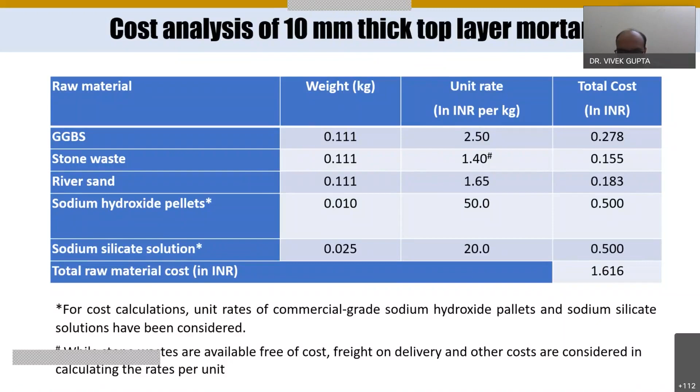So this is the cost analysis of 10 mm thick top layer mortar, and we found that the cost of this particular layer is 1.616, and there is an effective increase in the cost of rupees 1.31. But as you have seen in the last slide, we do not require the mortar and the paint, so there is a cost saving of almost 2.49 rupees when we compare the overall cost of the brick using these particular

bricks. This is the manufacturing methodology we have proposed for producing the bi-layer bricks. We will see the actual demonstration also. In the first step, we bring the punch to an intermediate level and fill the first layer material, and then we move down to create the additional space for the second loose fill layer. In the first layer we can put the normal mortar, and in the second layer we can put the colored mortar. There is no difference in that.

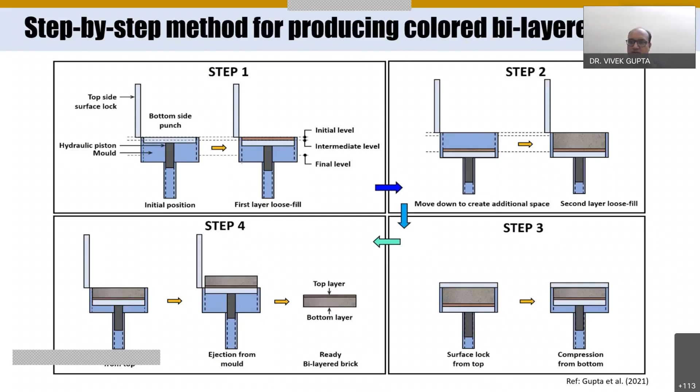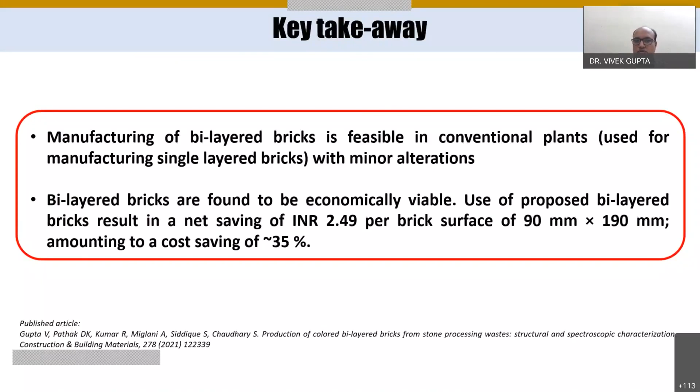These are the key takeaways: the manufacturing of bi-layered bricks is feasible in the conventional plant used for manufacturing single layered bricks with minor alterations, and the bi-layered bricks are found to be economically viable. Use of proposed bi-layered bricks results in a net saving of rupees 2.49 per brick surface of 90 mm by 190 mm, amounting to a cost saving of 35%. So there are opportunities for the industries for technology transfer of the developed product, and opportunity for research collaboration. If someone wants to collaborate in the field of gainful utilization of waste in pre-manufactured products, that can be done very easily.